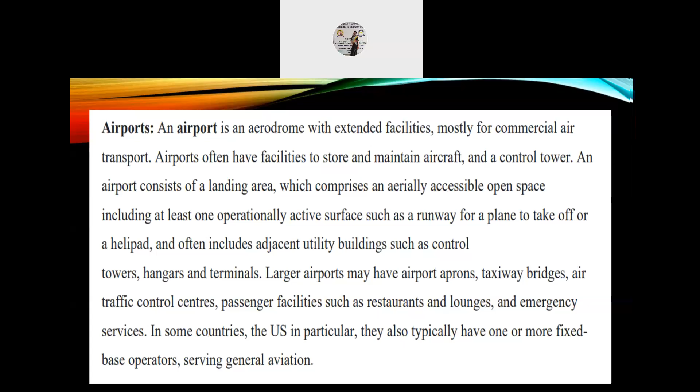An airport solely serving helicopters is called a heliport. An airport for use by seaplanes and amphibious aircraft is called a seaplane base. Such a base typically includes a stretch of open water for takeoffs and landings and a seaplane dock for tying up. Hartsfield-Jackson Atlanta International Airport in USA is the busiest and biggest airport in the world.

An international airport has additional facilities for customs and passport control, as well as incorporating all the aforementioned elements. Such airports rank among the most complex and largest of all built typologies, with 15 of the top 50 buildings by floor area being airport terminals.

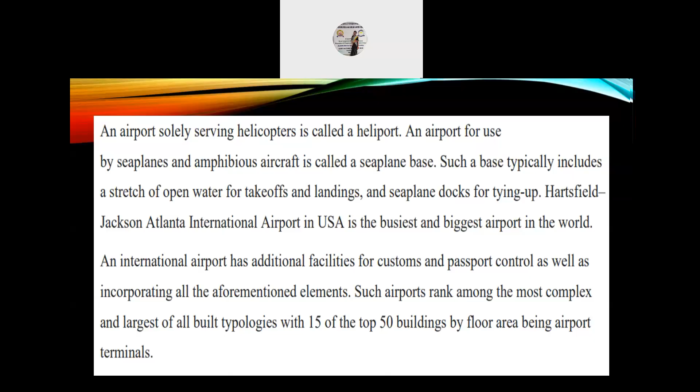Next, seaport. A port is a maritime facility which may comprise one or more wharves where ships may dock to load and discharge passengers and cargo. Although usually situated on a sea coast or estuary, some ports such as Hamburg, Manchester, and Duluth are many miles inland with access to the sea via river or canal.

Because of their roles as a port of entry for immigrants, many port cities such as London, New York, Shanghai, Los Angeles, Singapore, and Vancouver experience dramatic multi-ethnic and multicultural changes. So today, by far the greatest growth in port development is in Asia, the continent with some of the world's largest and busiest ports, such as Singapore and the Chinese ports of Shanghai and Ningbo Zhoushan.

The terms port and seaport are used for different types of port facilities that handle ocean-going vessels, and river port is used for river traffic such as barges and other shallow draft vessels: 1. Dry port, 2. Fishing port, and 3. Inland port. A seaport is further categorized as cruise port or a cargo port.

Additionally, cruise ports are also known as home port or a port of call. The cargo port is also further categorized into a bulk or break bulk port or as a container port.

Riverways. Water transport in India has played a significant role in the country's economy and is indispensable to foreign trade. It has the largest carrying capacity of any form of transport and is most suitable for carrying bulky goods over long distances. It is one of the cheapest modes of transport in India as it takes advantage of natural track and does not require huge capital investment in construction and maintenance except in the case of canals. Its fuel efficiency contributes to lower operating costs and reduced environmental impact due to carbon.

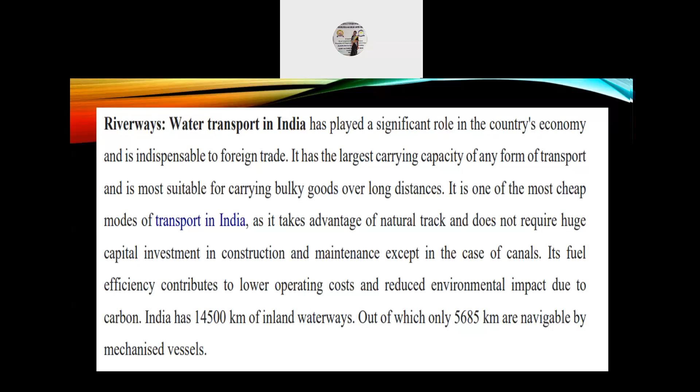India has 14,500 kilometers of inland waterways, out of which only 5,685 kilometers are navigable by mechanized vessels. India has an extensive network of inland waterways in the form of rivers, canals, backwaters, and creeks. The total navigable length is 14,500 kilometers, out of which about 5,200 kilometers of river and 4,000 kilometers of canal can be used by mechanized crafts.

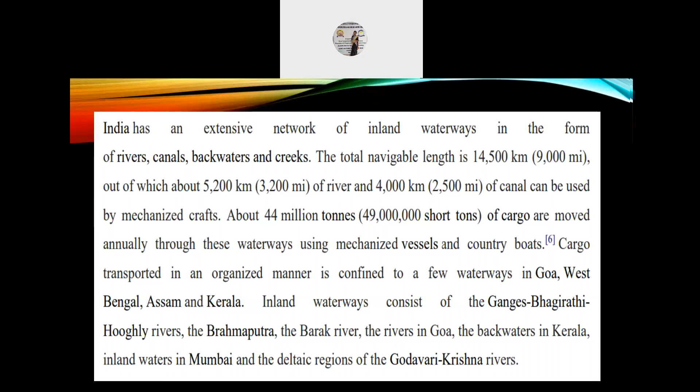About 44 million tons of cargo are moved annually through these waterways using mechanized vessels and country boats. Cargo transported in an organized manner is confined to a few waterways in Goa, West Bengal, Assam, and Kerala. Inland waterways consist of the Ganges, Bhagirathi, Hooghly rivers, the Brahmaputra, the Barak river, the rivers in Goa, the backwaters in Kerala, inland waters in Mumbai, and the deltaic regions of the Godavari, Krishna rivers.

Next, sea canals. Canals are waterways, channels, or artificial waterways for water conveyance or to service water transport vehicles. They may also help with irrigation. It can be thought of as an artificial version of a river. In most cases, the engineered works will have a series of dams and locks that create reservoirs of low-speed current flow. These reservoirs are referred to as slack water levels, often just called levels.

A canal is also known as a navigation when it parallels a river and shares a part of its water and drainage basin, and leverages its resources by building dams and locks to increase and lengthen its stretches of slack water levels while staying in its valley. In contrast, a canal cuts across a drainage divide atop a ridge, generally requiring an external water source above the highest elevation.

Many canals have been built at elevations towering over valleys and other waterways crossing far below. Canals with sources of water at a higher level can deliver water to a destination, such as a city where water is needed. The Roman Empire's aqueducts were such water supply canals.

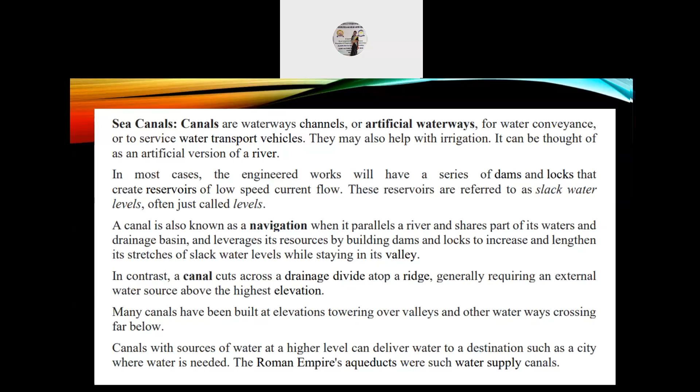The last one of the transportation types is tunnels. A tunnel is an underground passageway dug through the surrounding soil, earth, or rock and enclosed except for entrance and exit, commonly at each end. A pipeline is not a tunnel, though some recent tunnels have used immersed tube construction techniques rather than traditional tunnel boring methods. A tunnel may be for foot or vehicular road traffic, for rail traffic, or for canal.

The central portions of a rapid transit network are usually in tunnels. Some tunnels are aqueducts to supply water for consumption or for hydroelectric stations, or are sewers. Utility tunnels are used for routing steam, chilled water, electrical power, or telecommunication cables, as well as connecting buildings for convenient passage of people and equipment.

Secret tunnels are built for military purposes or by civilians for smuggling of weapons, contraband, or people. Special tunnels, such as wildlife crossings, are built to allow wildlife to cross human made barriers safely. Tunnels can be connected together in tunnel networks.

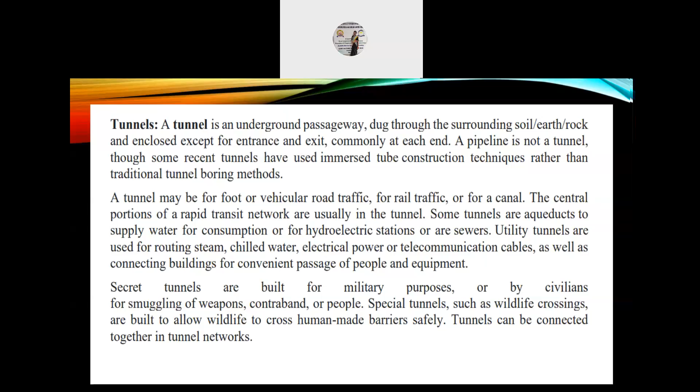Next topic is futuristic systems. The type is Hyperloop. A Hyperloop is a proposed mode of passenger and freight transportation, first used to describe an open source Vactrain design released by a joint team from Tesla and SpaceX.

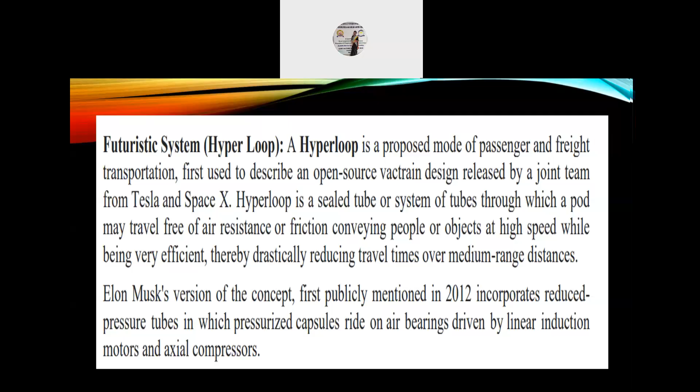Hyperloop is a sealed tube or system of tubes through which a pod may travel free of air resistance or friction, conveying people or objects at high speed while being very efficient, thereby drastically reducing travel times over medium range distances. Elon Musk's version of the concept, first publicly mentioned in 2012, incorporates reduced pressure tubes in which pressurized capsules ride on air bearings driven by linear induction motors and axial compressors.

The Hyperloop Alpha concept was first published in August 2013, proposing and examining a route running from the Los Angeles region to the San Francisco Bay Area, roughly following the Interstate 5 corridor. The Hyperloop Genesis paper conceived of a Hyperloop system that would propel passengers along the 350-mile route at a speed of 760 mph, which is 1200 km per hour, allowing for a travel time of 35 minutes, considerably faster than current rail or air travel times.

Preliminary cost estimates for this LA to SF suggested route were included in the white paper: $6 billion for a passenger-only version and $7.5 billion for a somewhat larger diameter version transporting passengers and vehicles.

Although transportation analysts had doubts that a system could be constructed on that budget, some analysts claim that a Hyperloop would be several billion dollars over budget, taking into consideration construction, development, and operation costs.

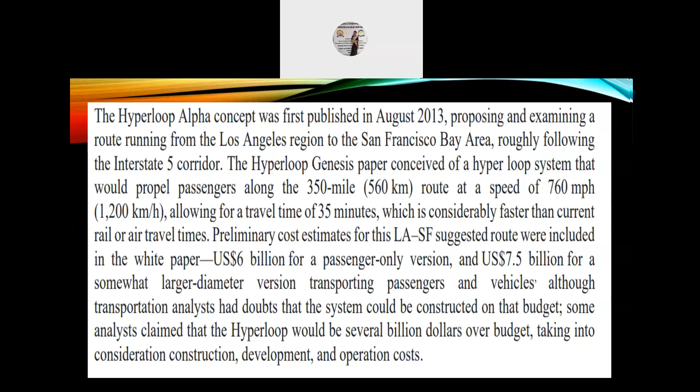The Hyperloop concept has been explicitly open sourced by Musk and SpaceX, and others have been encouraged to take the ideas and further develop them. To that end, a few companies have been formed and several interdisciplinary student-led teams are working to advance the technology. SpaceX built an approximately 1-mile-long subscale track for its pod design competition at its headquarters in Hawthorne, California.

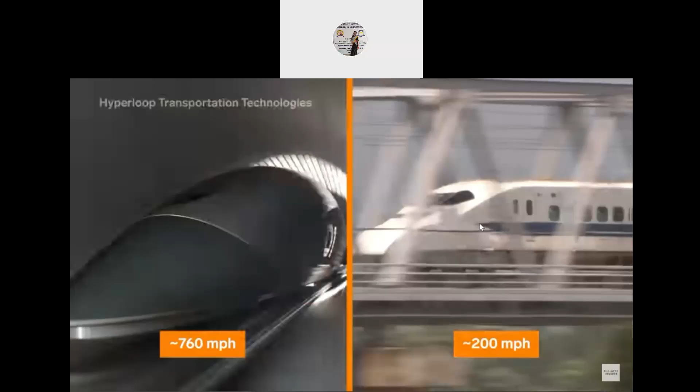This is the future of high-speed transportation. It's 3.5 times faster than Japan's Shinkansen bullet trains, and even faster than a Boeing 747. It's a hyperloop, magnetic pods levitating inside a tube at more than 1,000 kilometers per hour. In theory, you could go from LA to San Francisco in just 35 minutes, with tickets less than $100 one way. This technology could make working and living in two different cities a norm, while also creating a world with less congestion and pollution.

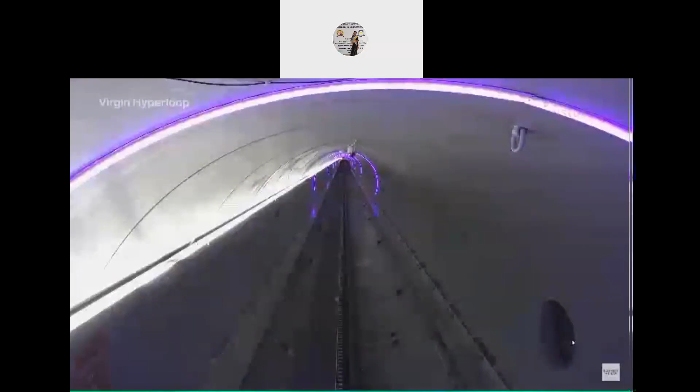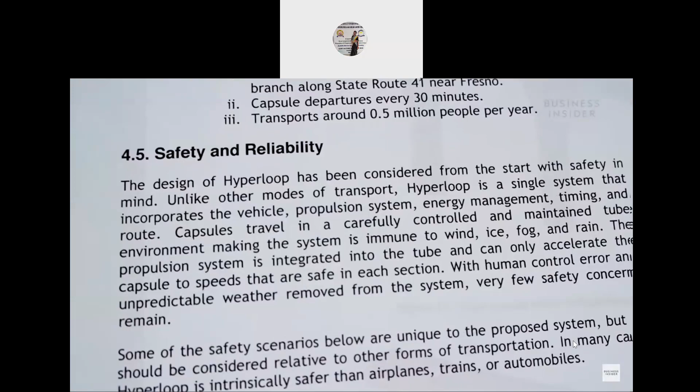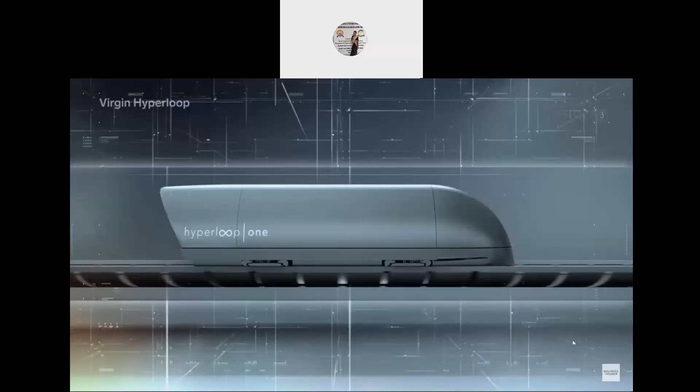Yes! And with a successful human test ride in November 2020, we could be less than 10 years away from it becoming reality. The concept of the Hyperloop became widely popular in 2013 thanks to Elon Musk's 58-page Hyperloop Alpha paper that outlined the design, cost, and safety of the concept. But the technology to bring it all together commercially was only recently fine-tuned, namely magnetic levitation, or maglev. Maglev is basically what allows a Hyperloop to go incredibly fast, thanks to the lack of friction between the passenger-carrying pods and the tube-shaped track. The general concept is simple.

Magnets lining the bottom of the pod repel the tube material, levitating the pod as it runs. As an engineer, I always get very excited about talking about magnetic levitation, electromagnetic repulsion.

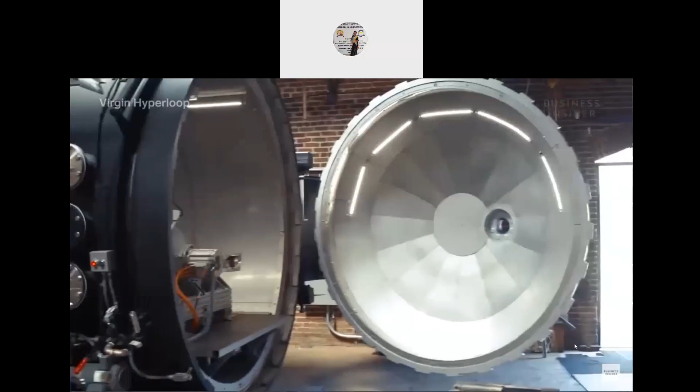That's Josh, a mechanical engineer who previously worked at SpaceX. He's now the co-founder and CTO of Virgin Hyperloop. And this is Chuck, the lead engineer at a different Hyperloop company, Hyperloop Transportation Technologies. They're both currently developing the best combination of magnets to create the smoothest ride possible, using passive or active maglev.

Passive maglev uses permanent magnets in a specific configuration to create a constant magnetic field that levitates the pod, similar to the magnets you might have played with as a kid. Active maglev uses a combination of permanent magnets and electromagnets, the latter which can manipulate the electric current and the strength of that current.

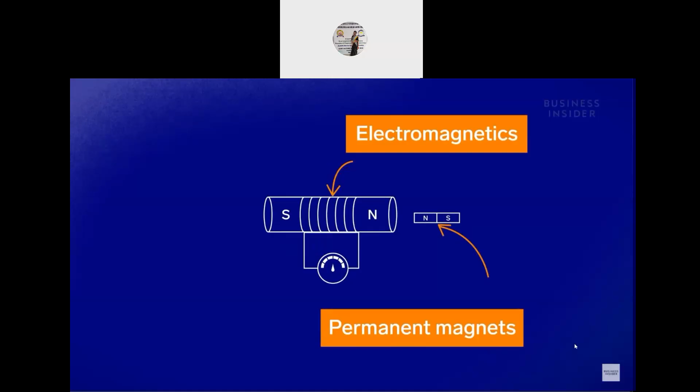Basically, if I get too close, I drive it one way. If I get too far, I add some strength. And so you can kind of think of it as balancing out. And so if there's bumps in the track, if there's all this, I have a system which we basically use as an active control system to make that ride smooth.

And while you might think this sounds similar to existing maglev trains, the Hyperloop concept removes a key element that holds a lot of trains and planes back: air resistance. If you ever stick your hand out a window when you're driving in a car, imagine if there was really no air there, you really wouldn't feel that force pushing back your hand. The same thing can be said for a Hyperloop.

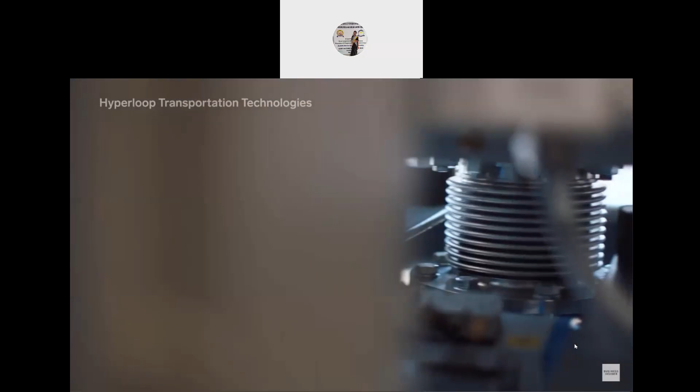This is where vacuum pumps come in handy. Both companies are installing pumps along the tube. For Hyperloop TT, the vacuum pumps are developed by Leybold, which invented the vacuum pumps about 150 years ago, so they have a lot of experience. These pumps, located every 10 kilometers, theoretically would suck out 99.9% of the air between the capsule and the tube.

Removing air drag could be the difference of some 800 kilometers per hour. Theoretically, you could go even faster than the speed of sound, but that's toying with some fun things that we'll do later on. It's going to take a little bit more time before we go supersonic, though. First, the companies have to prove the tech is safe, which is why this scene is so important.

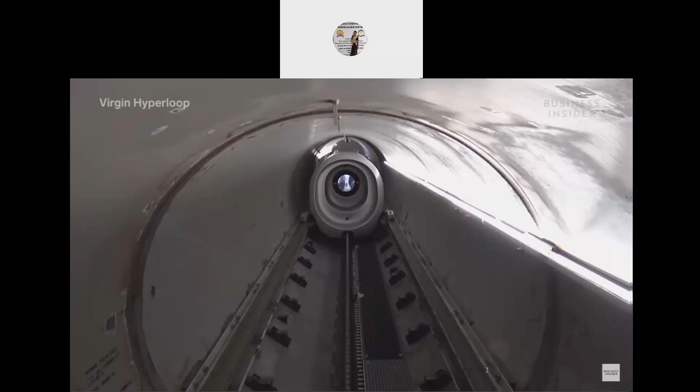In November 2020, Josh and Sarah from Virgin Hyperloop became the first people to ever ride a Hyperloop. The two-seat prototype Hyperloop traveled 500 meters, reaching 172 kilometers per hour within 6.25 seconds.

You felt a bit of force back in your seat. You really couldn't even notice the levitation. You didn't notice it pick up. But what you did notice is there wasn't that kind of jerkiness.

The camera didn't do it quite justice because the camera was bouncing around a bit more than we were. And it was a little bit more of like a cushion or like a pillowy type of feeling. You could process everything that was going on around you. You're basically coasting and you're floating on an idea that was nothing more than something on a piece of paper not all that long ago.

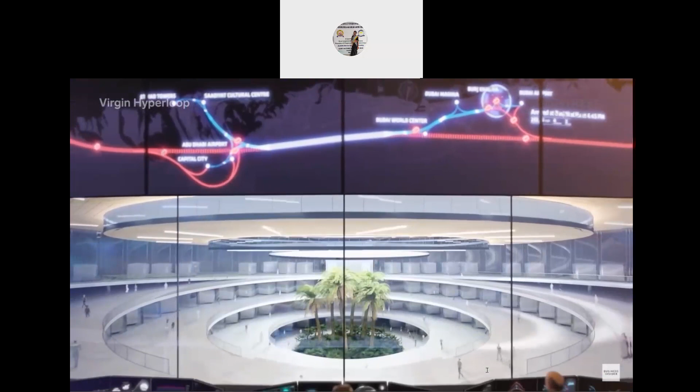While the ride proved its safety, the company wants to work more on the experience. The actual Hyperloop will be much bigger, too, holding 28 or more passengers, with the ability to move 30,000 passengers an hour. But to get to this point, there will be more testing involved for both companies.

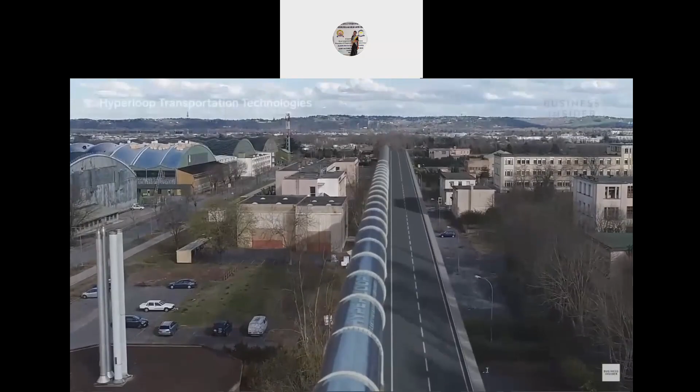Lots of things have to happen between now and then. The Hyperloop construction, the route, is one thing. The integration with the stations is another. And that takes a partnership with the communities.

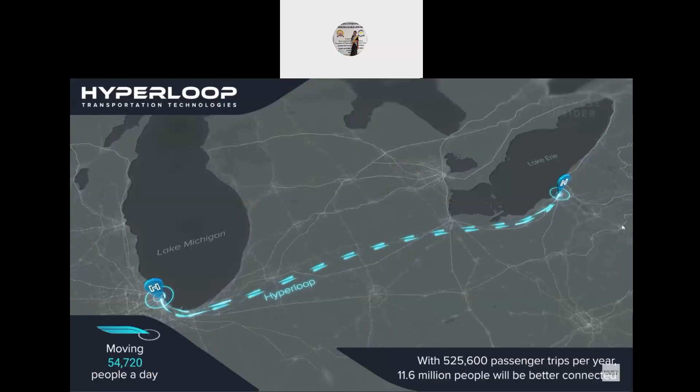Hyperloop TT is currently in the works to build and test a full-size project in Abu Dhabi. Its first potential U.S. project will run from Chicago to Cleveland. Virgin Hyperloop will be building its new certification testing facility in West Virginia in 2022, including a 9,600-meter track to be used for testing and establishing regulatory and safety guidelines.

Around 2025, we're intending to certify a fleet of vehicles, of the 28 passenger vehicles. Virgin Hyperloop has plans in Dubai, India, and more, with stateside plans for the Midwest, North Carolina, and Texas.

But both of these U.S. projects won't be complete until around 2030, which might sound like a long time, but airplanes took about 16 years to really get up and running. And the first high-speed rail in Japan took at least a decade of development. So some 15 years for a Hyperloop doesn't seem that far off.

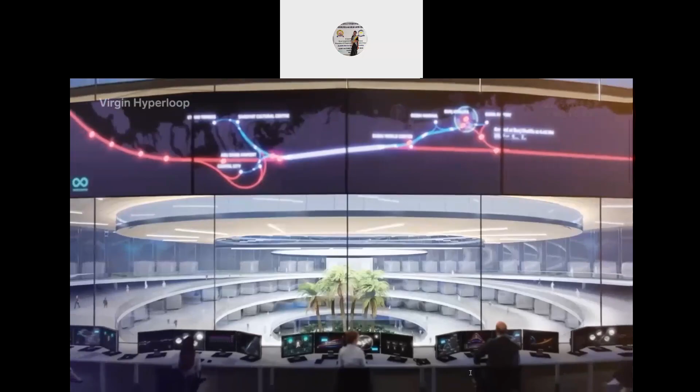After all, how can we be a 21st century country when we're built upon the technology of the 19th century, upon the 20th century? A single lane of Hyperloop can do in excess of 30,000 passengers. What are you going to invest in? What's the thing that you should invest in that allows you to get the future demand, the future needs that you have? A shift is possible if we choose to embrace it.